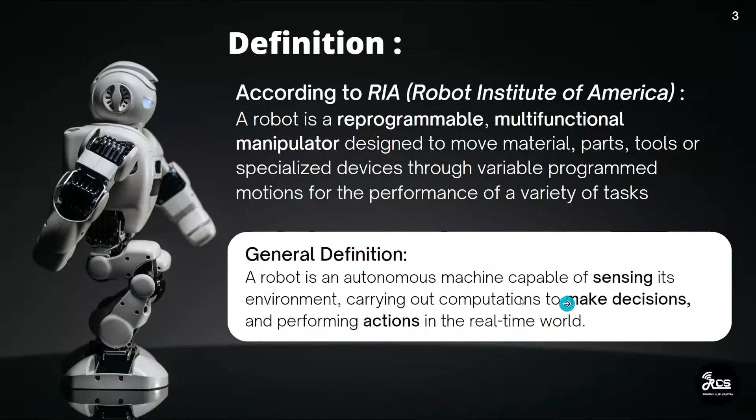So next we'll move on to the term robotics. So what is robotics? Any guesses? What is robotics? Any answers? You can type your answers in your chat box. Branch to study about robots. Okay. Robotics, design a robot. Great. And any more responses, guys? Okay.

So robotics is a branch of technology that deals with the design, construction, and operation of robots. So robotics is like a branch of technology, the intersection of science, engineering, and technology that produces machines called robots. It integrates fields of mechanical engineering, electrical engineering, information engineering, mechatronics, bioengineering. So there is no one certain discipline for robotics. It is a mix of various branches.

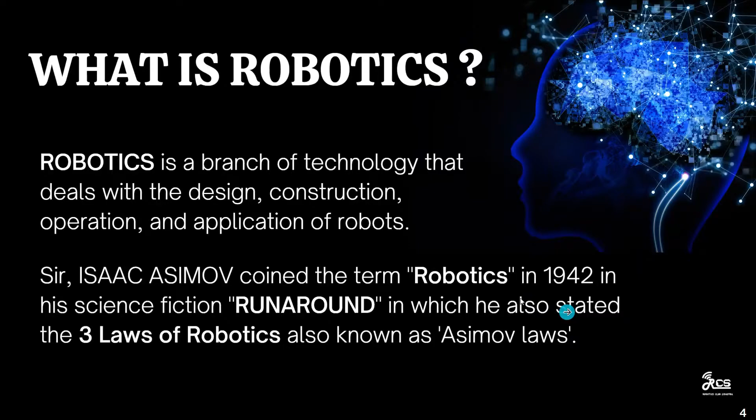The second law states that a robot must obey the orders given to it by human beings, except where such orders would conflict with the first law. So it should obey every order given by human beings, but the orders that it follows should not cause any harm to the human being.

And the third law, a robot must protect its own existence as long as such protection does not conflict with the first or second law. It should protect itself from humans causing any harm to it, and in this process, it should not hurt any other human being. Okay, are you clear, guys? Is that clear? Yeah, Akka. Yes. Okay, thank you.

Next, machines and robots. So what is a machine and what is a robot? And what is the basic difference between a machine and a robot?

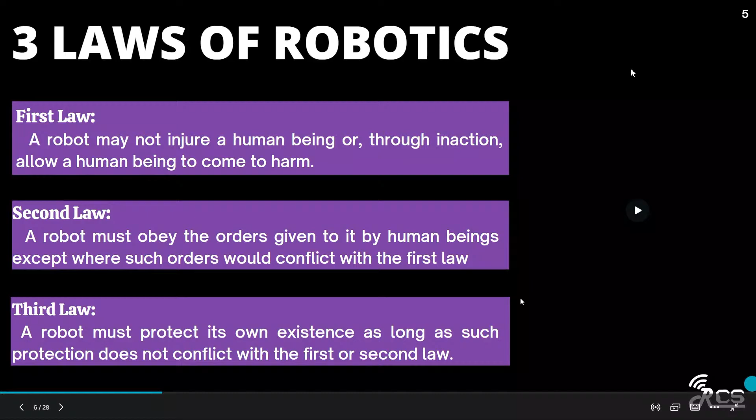Yes, Navya. No, but every robot is a machine. Yes. Not all times. Yes. Every robot is a machine. Okay. Great, guys. So we can say a programmed machine is a robot.

Bhavana, am I audible? There are three guys raising their hands. If there are any doubts, please ask them. Lakshmi Narayanan, are you having any doubts? Guys, if you don't have any doubts, please put down your hands. And if anyone has a true doubt, please raise your hand, because this is an interactive session. Bhavana, if there are no hands raised, you can go forward. Okay, Anna.

So a robot is a machine that can be programmed to do a complex series of actions. Every robot is a machine, but every machine need not be a robot. And every robot should sense, think, and act. As we have seen in the previous slides, a robot should be able to sense its surroundings, make decisions from that data, and act accordingly. So we have a washing machine, right? It is a programmed machine. Can we call a washing machine a robot? Anyone?

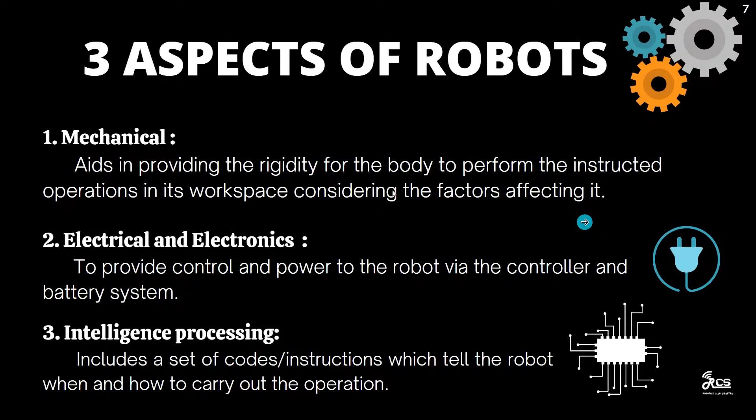So the next topic is the key components of a robot. So what are the main components of a robot? We have these five key components of the robot: the manipulator, end effector, controllers, sensors, and actuators and drivers. So what is a manipulator? A manipulator is similar to a robotic arm or human arm, which can help to pick or grasp objects. It works similar to a human arm, and we can see the details in further slides.

And next one is the end effector. The end effector is a device that is attached to the end of the robotic arm or the manipulator. It is the one which interacts with the outside environment. Okay. It allows the robot to perform its task with the outside environment. It interacts with the outside environment.

And next, controllers. Controllers command the robot to perform a specific task. It continuously reads the data from the sensors, and it is mainly used to make the decisions and command the robot to perform the task. And next, sensors. Sensors are devices that take input from the environment. These are the devices that detect changes in the environment and take the input, and then they convert the data into electrical signals and give it to the controllers.

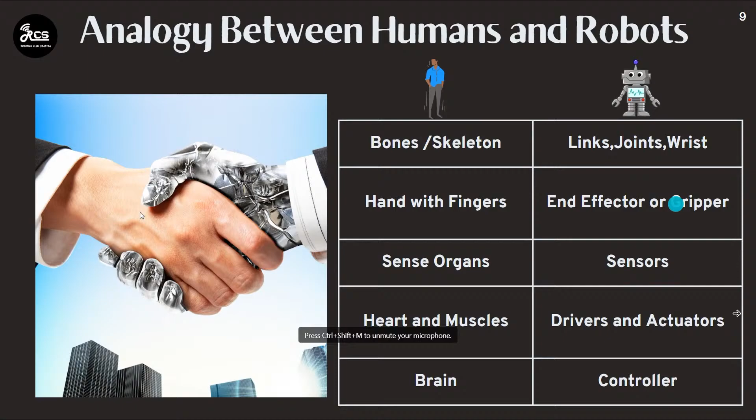So the next topic is types of robots. Based on design and application, we have numerous definitions of robots. In the same way, we can classify robots in many ways. Here we classify robots based on mobility in two ways: stationary or non-mobile robots, and mobile robots. Stationary robots can't move; they are fixed. Mobile robots can move through the environment.

You can see here in this video. They are used to transport raw materials or goods inside a manufacturing unit or industry. So they are just like load carriers. They are also called self-guided vehicles. They use wires or other types of sensors, without any human intervention, to move across the unit. They follow markers or wires placed on the floor to detect their movement and navigate around the place.

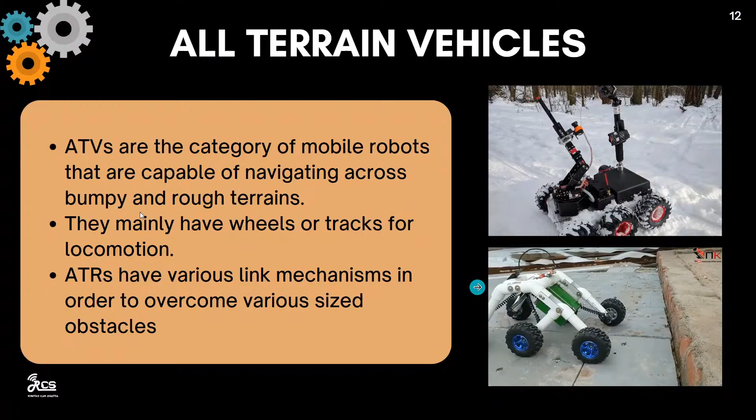Is that clear, guys? Interact, you guys. We need a yes from you. Can I go ahead, or are you having any doubts? Excuse me, this is Karthik.

I have wondered for what purpose that AGV is used. AGV. Yeah, so for what purpose they are used. AGVs are used to transport the materials or the goods in an industry. In industry, we should transport the goods from one place to another place. After packaging the goods, we have to move them from one place to other place, right? So until now, we are using humans to do that.

But these AGVs, without the intervention of humans, can autonomously move the loads from one place to other place. As you can see in the video, wait, I'll show.

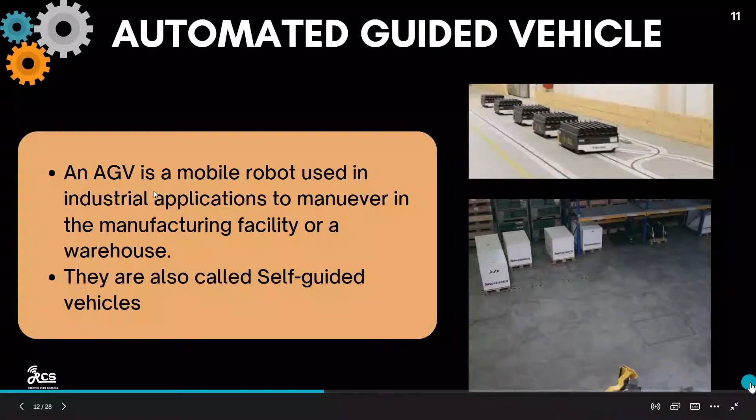So, Bhavna. Yes, ma'am. Yeah, just let me take this one. Am I audible? Yeah, bro.

Oh yeah, these AGVs are automated guided vehicles. You know line follower bots and all, right, guys? Yeah, some will be following QR codes and all. Similarly, an AGV follows a few set points to reach its destination and back. Basically, you want to move a load in a warehouse from point A to point B.

So what you can do, you'll just use some person to use a crane and move that object from there to here. So from A to B, we have a fixed path. So there's nothing new. From that point to point B, it has to be guided autonomously. So what we have is a few QR codes set along that path so that this AGV recognizes the QR code and goes to the set point.

That is the warehouse point from where it has to move the product to point B. So from point A to point B, it takes the goods from there to here without any human intervention. So it is guided by those QR codes, like an already pre-planned path is given to it.

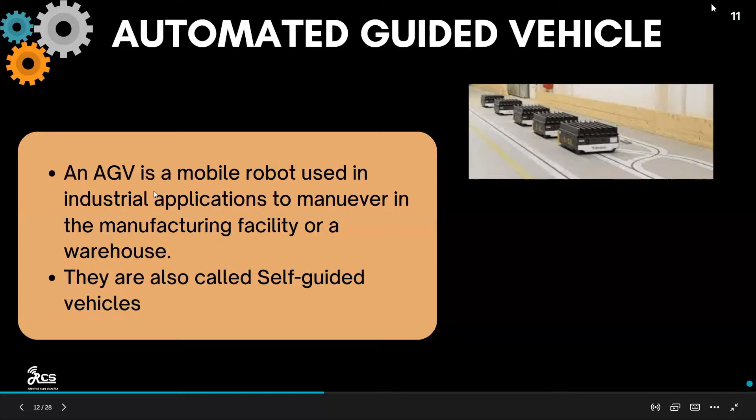Is your doubt clear, Karthik? Yeah, bro. Thanks. Okay. Banu, you can continue. Okay, Anna. And next.

And next we have legged robots. So these legged robots are mobile robots that use mechanical limbs which provide active suspension for movement in highly unstructured environments. So these mechanical limbs are similar to our legs, the legs of humans or legs of animals, and they are used for mobility in the environment. So they can traverse many different terrains.

Okay. But it is somewhat complex to build a legged robot and teach the robot how to walk and how to balance itself. But legged robots are very useful. And we have a question: why are legged robots better than ATRs? So ATRs, all-terrain vehicles, use wheels and tracks for motion. And in legged robots we are using mechanical limbs which are similar to legs.

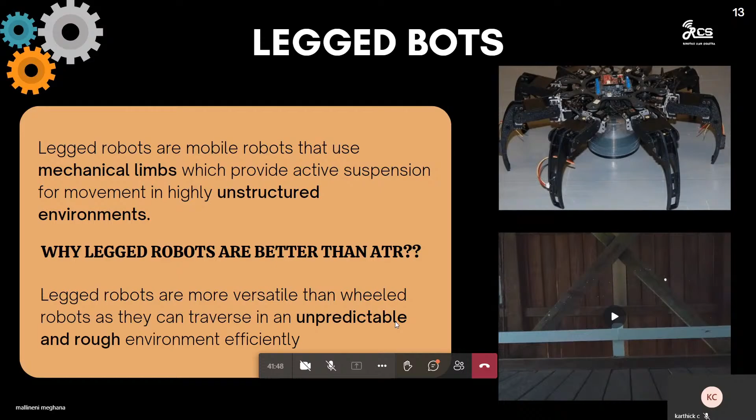So legged robots are far better than ATRs, and why? Legged robots are more versatile than wheeled robots as they can traverse an unpredictable and rough environment efficiently. So these legged robots can travel on any kind of surface, even one that is inaccessible by wheels. Okay. So do you have anything to say about this?

Like why are legged robots better than ATRs? ATRs in the sense wheels and tracks. So why are legged robots better than ATRs? Do you have any idea, guys? Maybe legged robots have more grip than the other one. Okay. Any other answer?

Or they don't leave a trace. Come again, Navya. They don't leave a... Okay. It can be brought back to the original position if it flips. Hello? Can you hear me? Okay.

Yeah. Like, for example, wheeled robots, when they are flipped, they cannot go back to their original position. But when you have limbs, that can be relatively easy. So ATRs, we are having wheeled robots and robots which are having tracks. And the robots which are having tracks, even after flipping, they can get their original position back. So they can move into their original position.

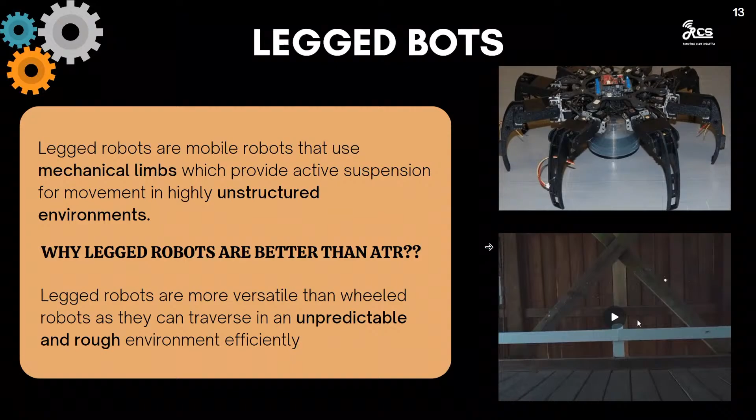Next. Hello? Yeah, I have a doubt. Can we have a combination of limbs and wheels? Okay, it's a thing. It's up to our creativity. We can have, I guess.

So these are some of the types of legged robots. We are having pogo stick robots, which have one mechanical limb, bipedal robots with two legs, tripodal robots, which have three limbs, and similarly quadrupedal robots and hexapodal robots. So these are some of the types of legged robots.

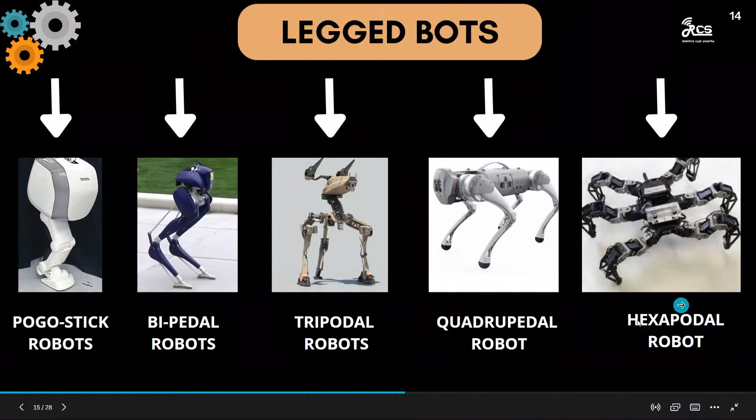And next we are having AMRs, autonomous mobile robots. An AMR can perceive and move through its environment without being directly monitored by an operator or any predetermined course. AMRs have sophisticated sensors that allow them to understand and interpret their surroundings and help them navigate around obstacles and reach their destination in the most optimal and efficient way possible. They use advanced mapping technologies that enable them to know the environment they are in, get its map, and move accordingly.

So without being directly monitored by any humans, they can navigate through the facility or the unit autonomously. And there is no hardware like wires or magnetic tapes on the floor to detect. It uses path planning algorithms to move through the unit. Are you having any doubts, like confusion between AMRs and others?

Okay, rovers on Mars use wheels. Why don't they use limbs if it's better? Researchers are still working on legged robots. We humans take years to learn how to walk, and it's somewhat complex to build legged robots and teach them how to move and balance themselves. So there is extensive research still going on in the field of legged robots.

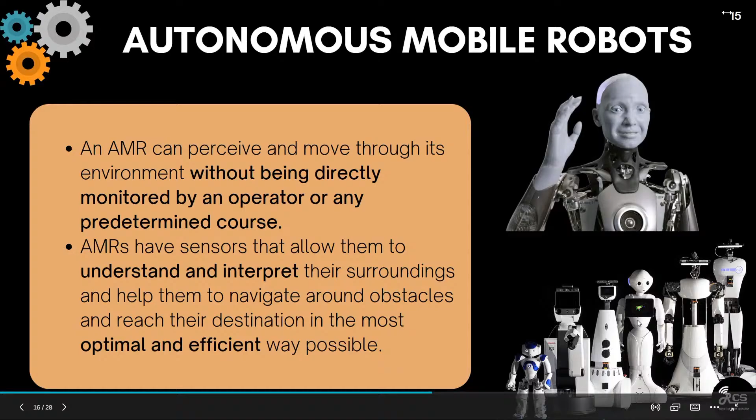So, any doubts in AMRs, or any confusion? These AMRs can perform free and natural navigation, and they can adapt to changes in their environment easily. If the environment around it changes, this robot can change its path accordingly. It can adapt to the changes easily.

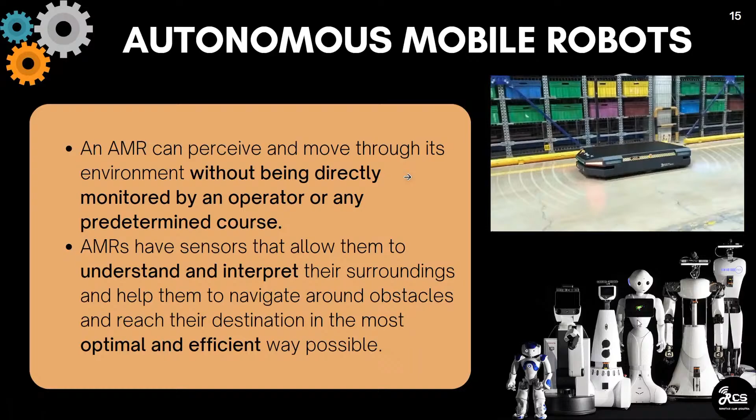So next we are having AUVs, autonomous underwater vehicles. An AUV is an unmanned submersible vehicle that requires no real-time input or control from an operator. AUVs are robotic vehicles that are pre-programmed with mission parameters and then deployed into the ocean. So before placing them into the ocean, these robots are pre-programmed. We can use these AUVs for underwater search and exploration activities and survey missions without any human or other operator.

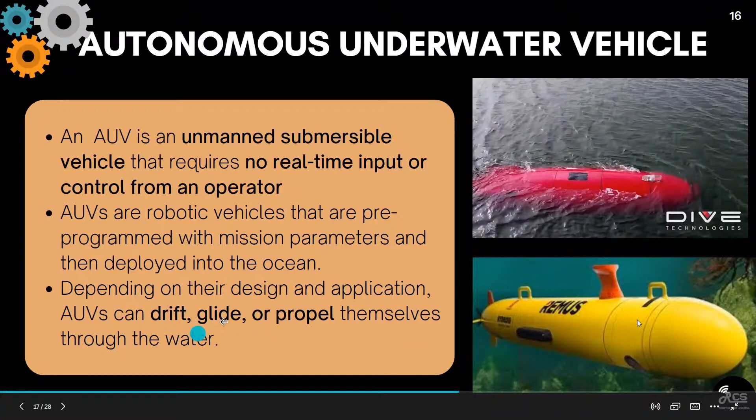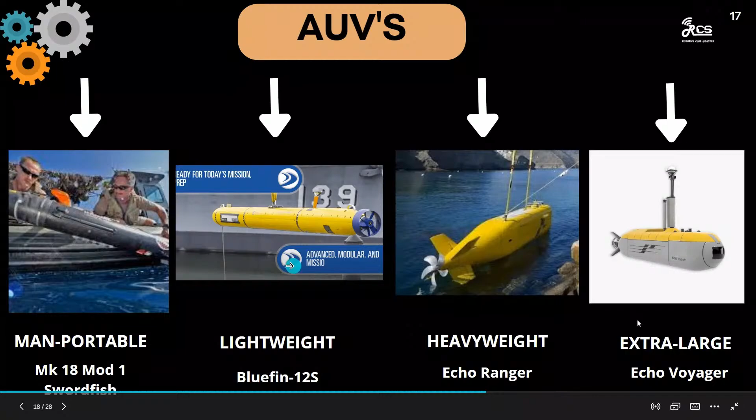So they can be used to study the ocean floor or to determine the physical and biological characteristics of the water. Without any human or other operator, these AUVs can autonomously do all these things. Depending on their design and application, AUVs can drift, glide, or propel themselves through the water. These are the movements. These are the types of AUVs: man portable, lightweight, heavyweight, and extra large. They are classified based on their weight and size.

And next, we are having UAVs, unmanned aerial vehicles. UAVs are a class of aircraft that can fly without the onboard presence of pilots. So we can say a UAV is a powered vehicle that can fly without a pilot on board. They are aircraft without any human pilot or crew members. They consist of the aircraft component, sensor payloads, and a ground control station.

These robots can be controlled by onboard electronic equipment present on the aircraft itself, or via control equipment from the ground. We can control the robot from the ground; a human can control it using some control mechanism.

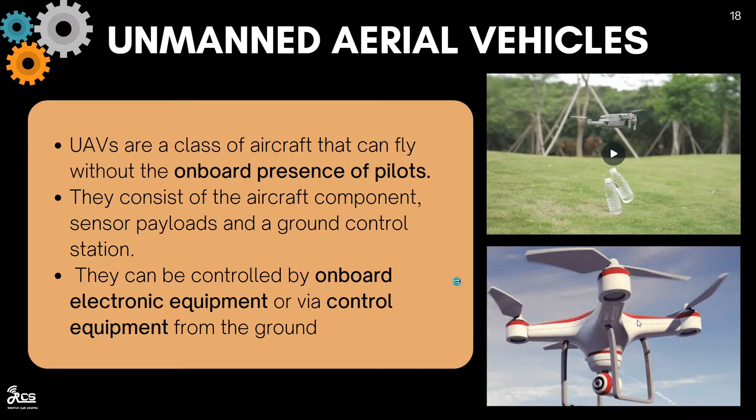And these are basically used for military missions. Okay, so they are similar to drones. Now let's see some classification of UAVs. So UAVs are classified based on wing type, based on the weight, based on the altitude they fly, based on flying height, and based on some special application and based on some range. So we can classify UAVs based on different aspects.

So based on the wing type, we are having rotary wing, fixed wing, flapping wing. Rotary wing in the sense they will have some blades, and the aircraft will be powered by rotating blades, such as helicopters. And fixed wings we have seen mostly in airplanes, so the wings will be fixed and they don't move. So fixed wings. Okay. And then the flapping wings, just as birds, like we can have aircrafts that can fly by flapping their wings.

And based on the weight, we have micro UAV, miniature UAV, heavier UAV. So micro in the sense the weight of the aircraft should be less than 1 kg. And if the weight is between 1 to 25 kgs, we can consider it as a miniature aircraft. And if greater than 25 kg, we can have it as a heavier aircraft. And based on range, we have short range UAV, medium range, and long range UAV. And based on the altitude they fly, if less than 1 kilometer, then they are classified as low altitude aircrafts. And if 1 to 10 kilometers, medium altitude, and if greater than 10 kilometers, they are high altitude UAVs.

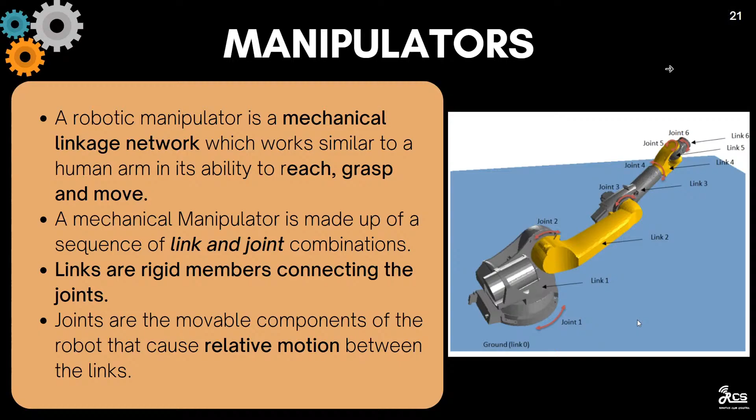And we are having two types of manipulators, serial manipulator and parallel manipulator. So let's see what is a serial manipulator. A serial manipulator is a mechanism of several links connected in series by various types of joints. So this is an example of serial manipulator where you can see these are the joints and links, joints and links. So these are connected serially, and this is the base at one end which is fixed, and the other end of the manipulator is the end effector which is free. So this is called an open chain manipulator. As we can see, one end is fixed and the other is open, and it can operate in a larger workspace too. So this is a serial manipulator.

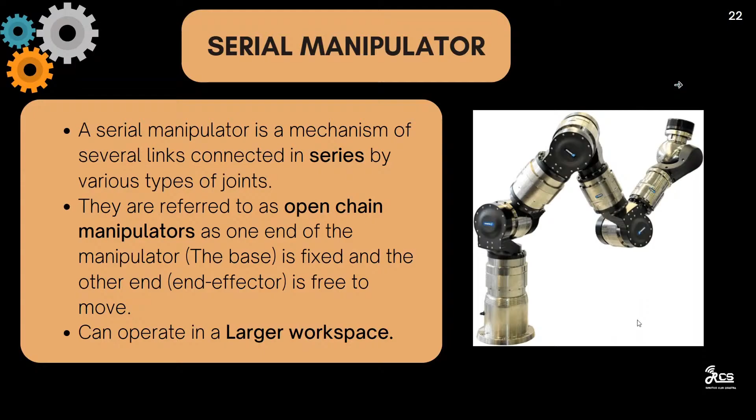So before moving forward, is that clear? Any doubts, guys? Okay. Can I go forward? Okay, no doubts.

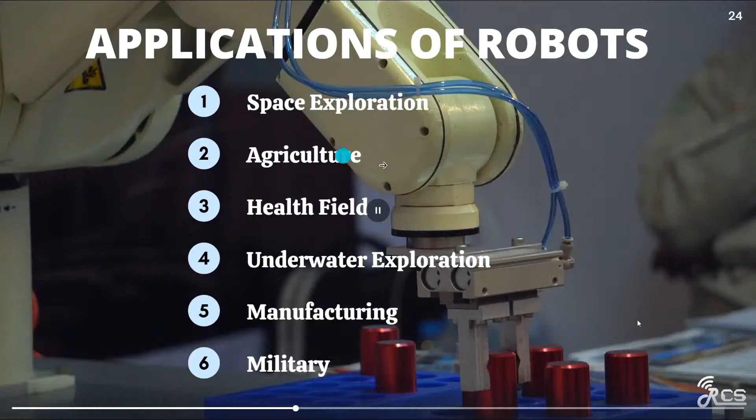We have reached the end, guys. Only one topic is left. That is the application of robotics. I want you guys to answer, where are we going to use robotics? In which fields are we going to use robotics? There are many fields where we use robots. So name some of the fields where we use robotics, some applications.

Automobile industries, okay. Defense industry, space organization, okay. Healthcare and surgeries, okay. Space research, food industries. Come on, guys. That's it, medical. Okay. Okay, let me continue.

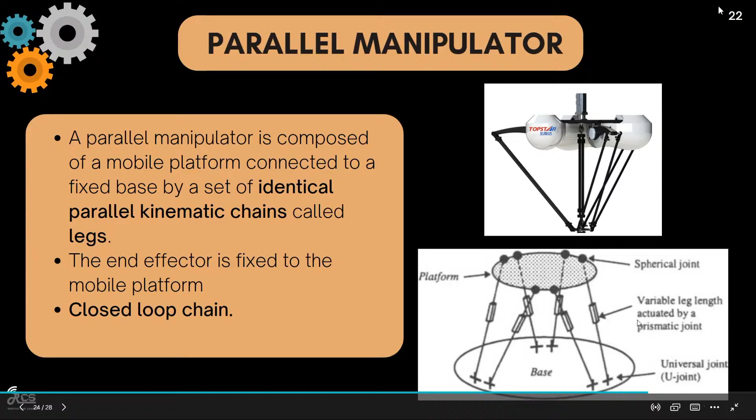So these are some various fields where we use robotics. The first one is space exploration. Sending a robot to space is much cheaper than sending a man. Even NASA says that robots can survive in space for many years and can be left out there, with no need for a return trip. If we are sending robots, there is no need of a return trip and no need of food and other accommodations, right? And these robots can also withstand harsh conditions like extreme temperature and high levels of radiation. So we can use robots in space exploration.

Next, in the agriculture field, we have seen many drones which are nowadays used in agriculture for spraying pesticides and all. And for weed control, we can use robots for harvesting, for environmental monitoring, that is detecting the temperature, moisture, humidity of the weather, and soil analysis. We can use sensors to analyze the soil, and we can use robots in agriculture.

Next, the health field. In the health field we can use robots that assist the doctors during surgery to hand over things like scissors or other medical stuff. They can also be appointed to take care of elderly or disabled patients, to supply them medicines, to take care of them, for taking blood samples, checking the temperature, improving patient hygiene, etc.